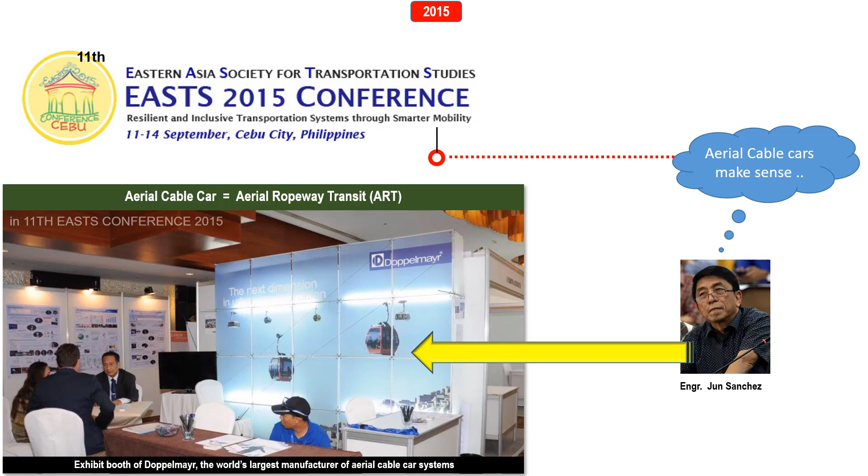Jun Sanchez is the chairman of the Metro Cebu Development and Coordinating Board Subcommittee on Infrastructure and Utilities. MCDCB is a body mandated to formulate development plans for the Metro Cebu area and coordinate their implementation. Its board is composed of the governor, the mayors of 13 cities and municipalities, regional heads of national government agencies, and private sector representatives.

In 2017, Jun and Kim Sanchez visited the ART in La Paz, Bolivia. As of this video in 2023, the La Paz ART is still the largest network of ARTs in the world, composed of 10 lines at 31 kilometers.

In 2018, engineers Jun and Kim Sanchez and transportation engineering expert Lynn Madrona made a learning visit at the Doppelmayr headquarters in Wolfurt, Austria. Since 2018, a team of engineers from Cebu and Manila have been in contact with Doppelmayr, Austria, learning more about ART and conducting ART studies.

JICA-funded Cebu Transportation Master Plan. JICA, or the Japan International Cooperation Agency, is a funding agency of the government of Japan. It provides financial and technical assistance to mostly developing countries through grants and loans.

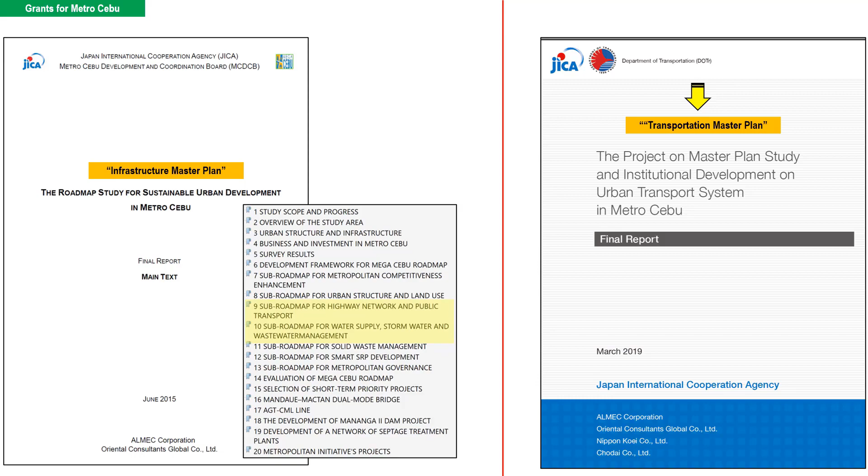JICA provided grants at no expense to the government for two very important infrastructure studies for Metro Cebu. The first was an infrastructure master plan that includes major roads, transportation, drainage, sewerage, and water supply. The second was a more detailed Transportation Master Plan. Recent examples of projects funded by JICA include the Fernan Bridge and the SRP Reclamation and Viaduct.

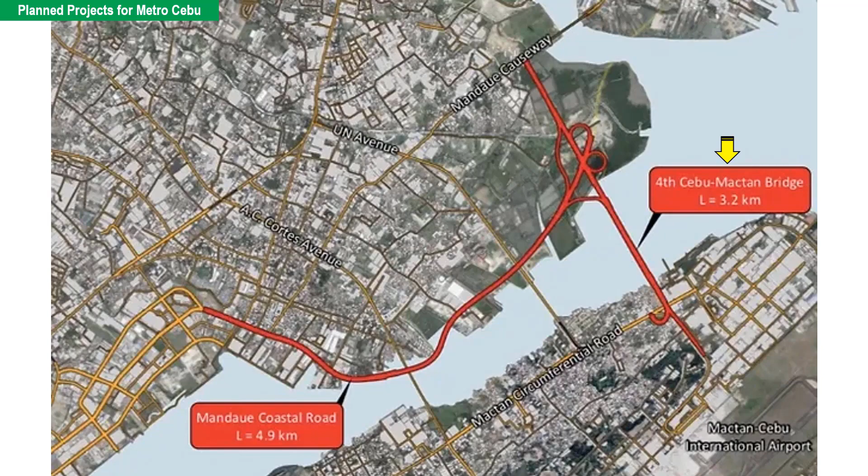Based on the two recent JICA studies, there are three major transportation projects that may be implemented soon. They are currently undergoing more detailed studies. The first two projects are the Mandaue Coastal Road and the Cebu-Mactan 4th Bridge. The third project is the implementation of LRT projects in Metro Cebu. The implementation of these two LRT projects is scheduled to start between 2025 to 2030.

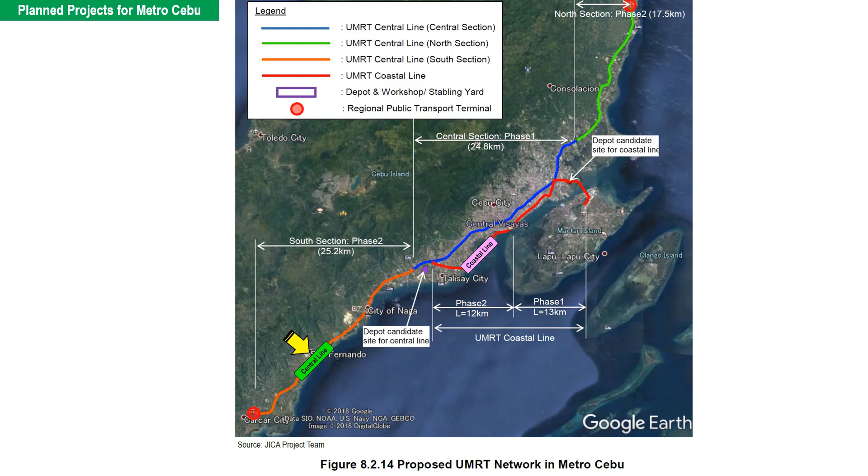The first is the Central Line. The second is the Coastal Line.

The two JICA studies proposed three types of potential mass transportation projects. First is the BRT. The JICA study did not elaborate on the BRT. There are already detailed studies on the Cebu BRT funded by the World Bank from 2011 to 2022. Its construction started in 2023.

Second is the ART. As with BRT, JICA did not elaborate on the ART. It cites its successful implementation in La Paz, Bolivia as a mode of transport. It recommends a feasibility study on potential routes. Japanese companies do not make urban ARTs, thus it is unlikely that an ART project will be funded through JICA.

The first urban ART in Yokohama, Japan was installed in 2021 by Doppelmayr, an Austrian company. Almost all urban ARTs in the world are built by European companies. Details on funding options for an ART will be elaborated in other chapters.

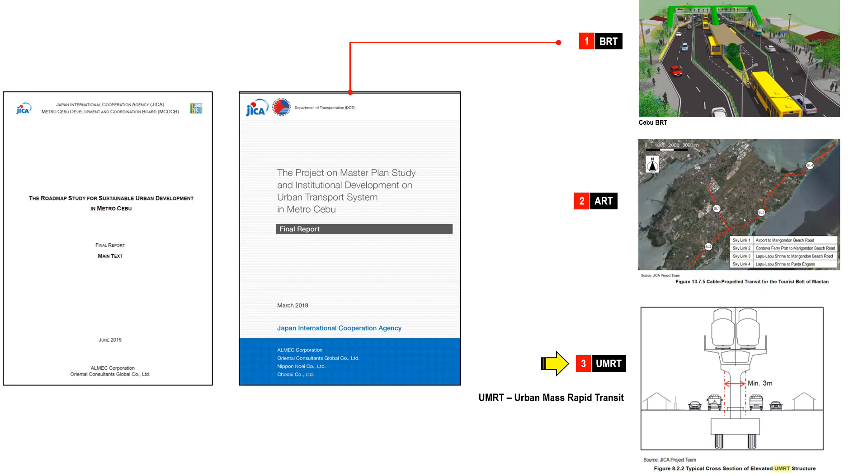Third is UMRT, or Urban Mass Rapid Transit. JICA has proposed two types of UMRT. First is LRT, or light rail transit. Second is AGT, or automated guideway transit. The main difference between the two is the LRT is propelled through steel tires, while the AGT is propelled through rubber tires. JICA has not yet decided which one to use. For this video series, we will assume it will be an LRT.

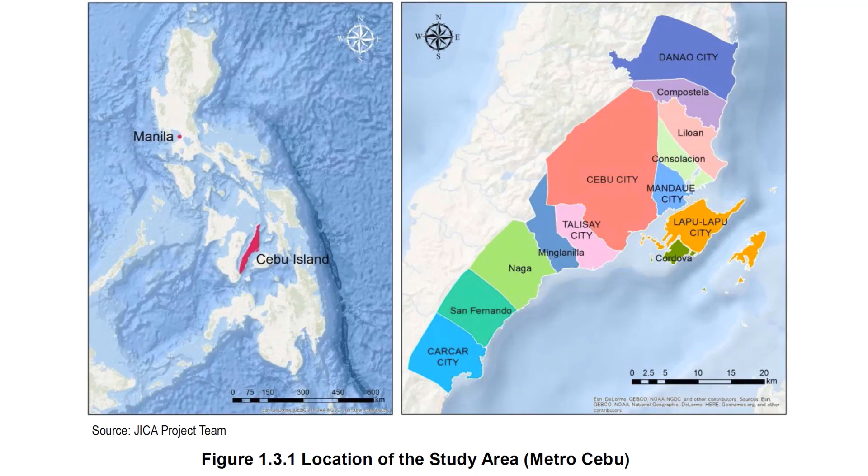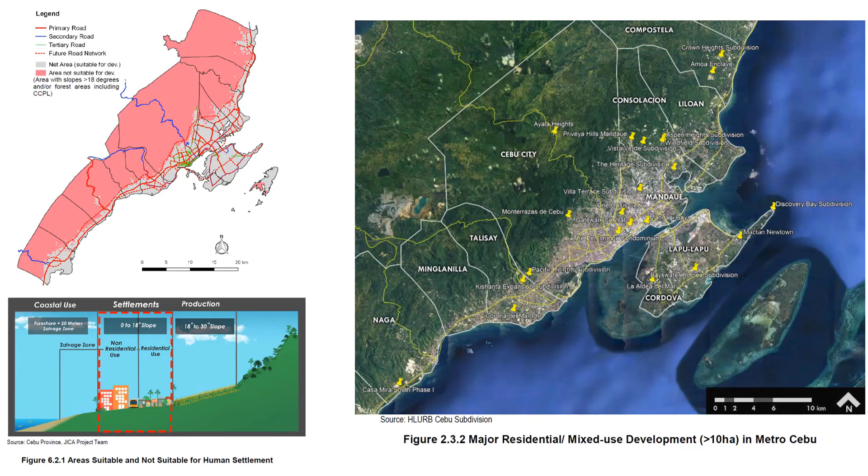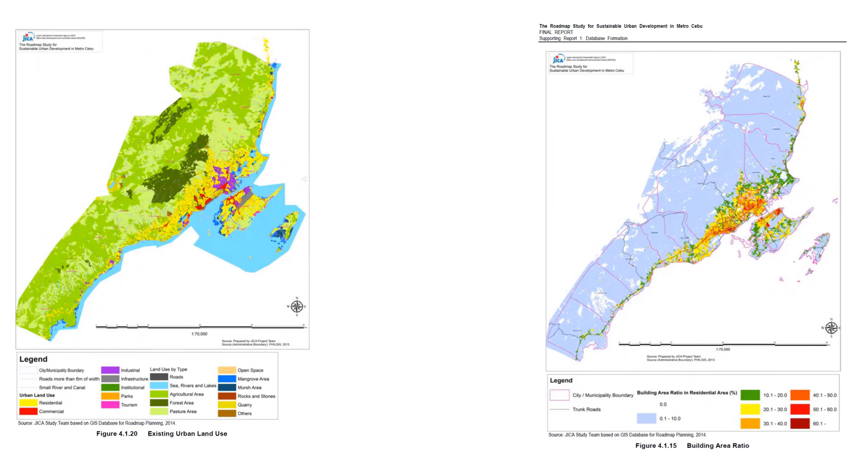JICA passenger traffic data collection and analysis. The JICA study covers the 13 component cities and municipalities composing the expanded Metro Cebu. The following parts of this video will show some of the passenger traffic data that were collected by JICA to determine the passenger demand in different parts of Metro Cebu. This data will then be used to determine a suitable mode of transport for a particular area in Metro Cebu. These are some of the data collected by JICA in determining passenger demand.

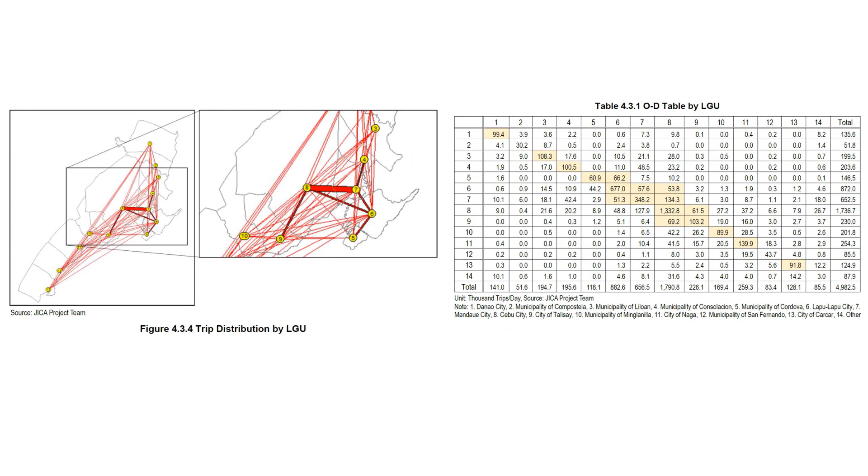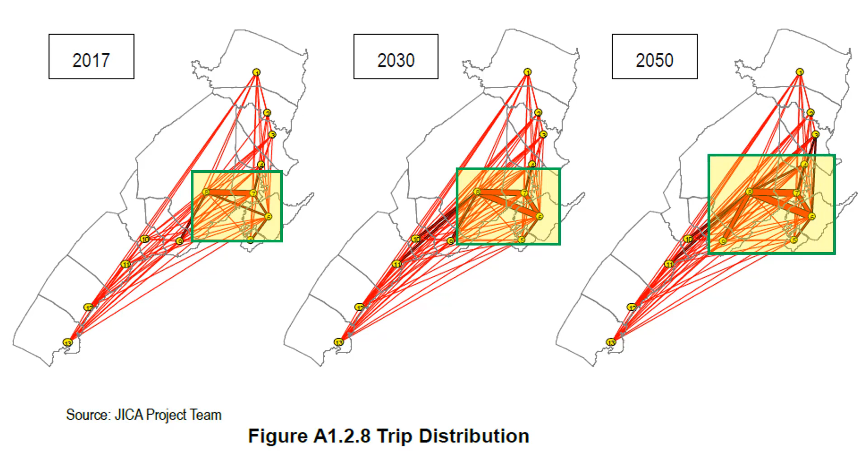Origin-destination surveys were conducted in Metro Cebu by LGU. The highest passenger traffic measured in 2017 was among passengers traveling in the tri-cities of Cebu, Mandaue, and Lapu-Lapu. There will be a massive increase by 2030 and 2050. The highest number of cars, motorcycles, and demand for public transport is in Cebu City, Mandaue, and Lapu-Lapu.

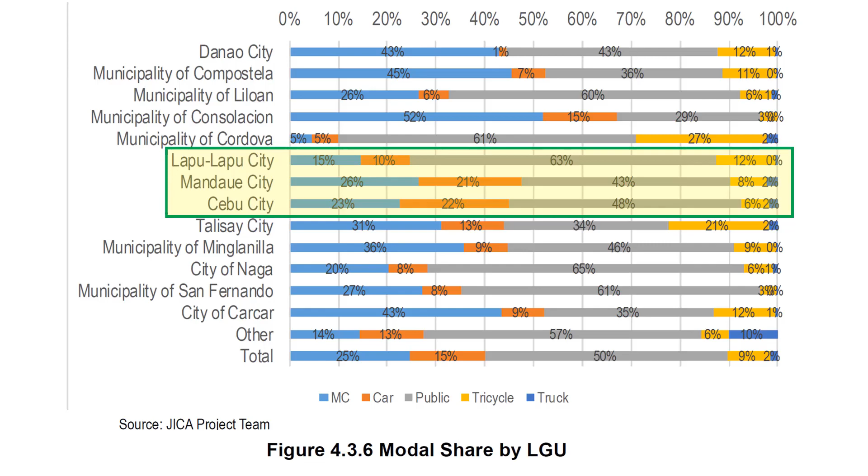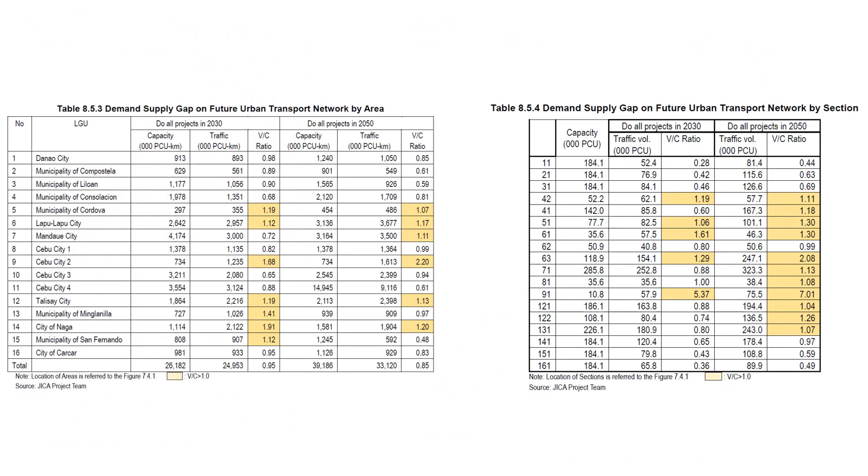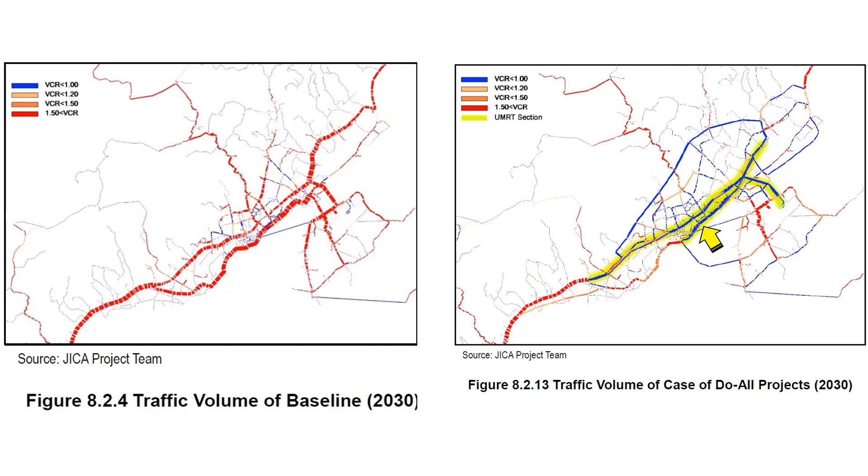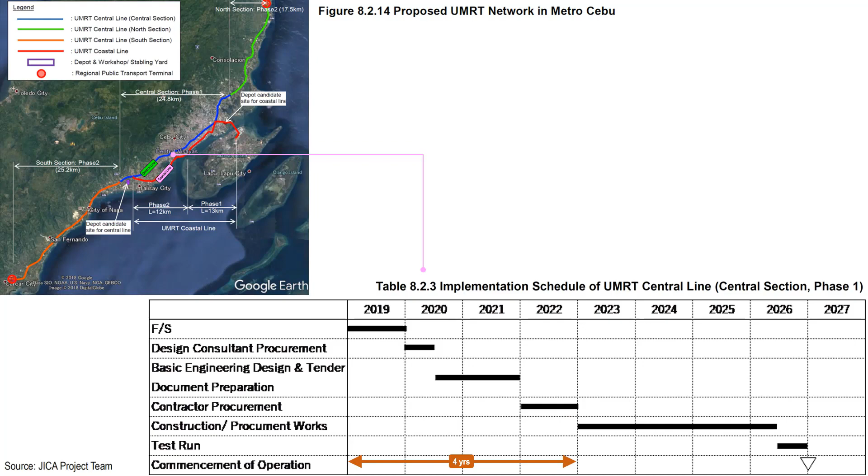The limit of this blue line is the location of the first phase of the Cebu LRT. This shows its implementation schedule. The feasibility study was supposed to have started in 2019, and construction was supposed to have started in January 2023. This 4-year period could simultaneously have been used to acquire additional right-of-way.

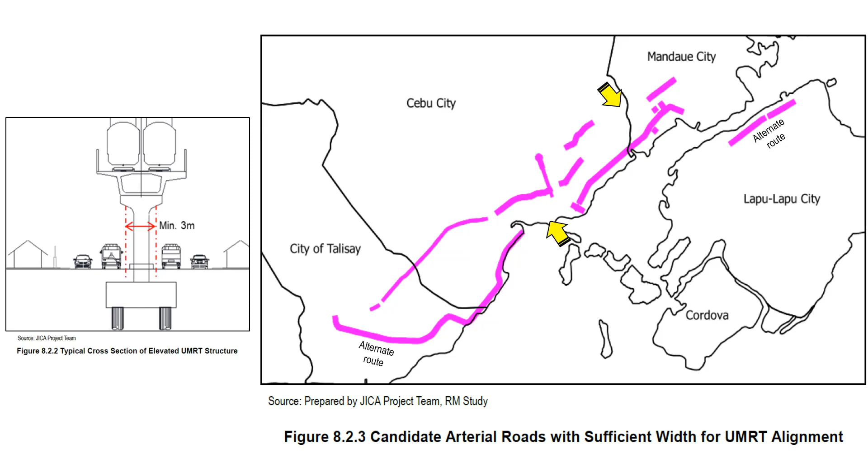This is a typical section of a 4-lane road in Cebu. To accommodate an LRT, the right-of-way needs to be increased by 3 meters, or the width of 1 road lane. In contrast, a BRT needs 2 road lanes. If bike lanes will be installed, an additional width of 2 meters is required.

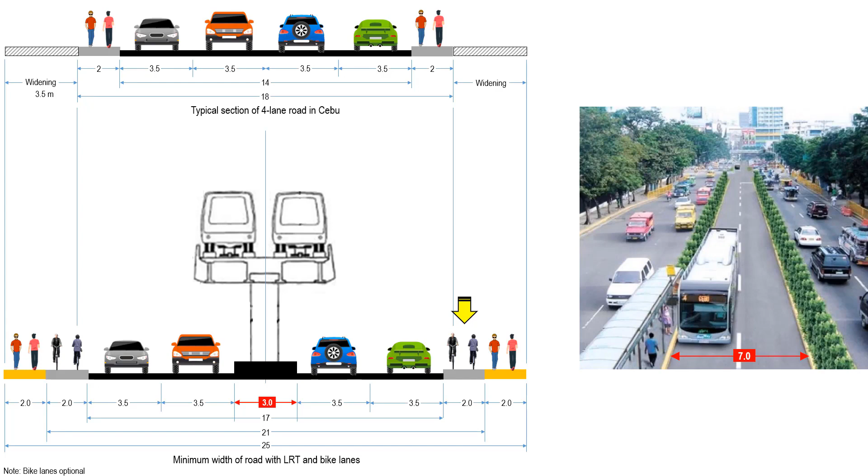Superimposing the central line and coastal line, it can be seen that extensive widening is required. These 2 most viable routes in Metro Cebu are about 25 kilometers each. It will take 5 to 10 years to acquire the widening along these 2 lines since they are already populated by numerous buildings on both sides.

The potential of Metro Cebu to have an LRT as early as possible greatly depends on the progress of acquiring the needed right-of-way. These 2 LRT lines can be implemented, and JICA has a very good record of implementing its proposed projects. LRTs appear to be the only viable mode of mass transport for the high passenger demand corridors in Cebu.

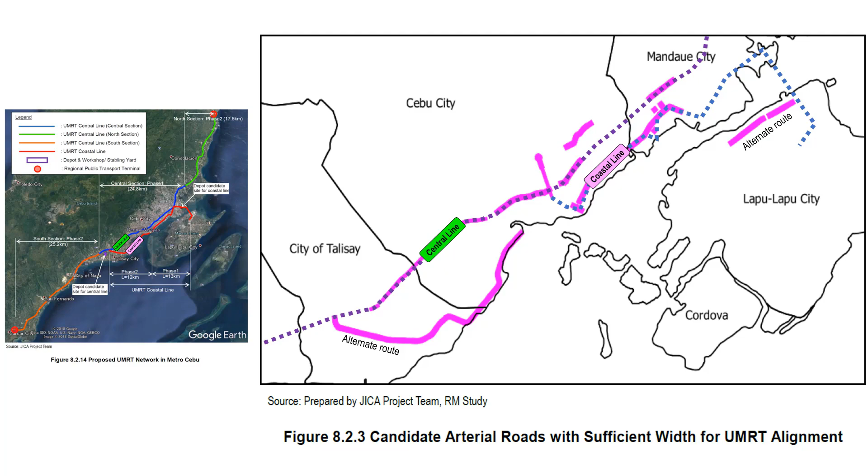BRT cannot serve high-capacity corridors, particularly in Cebu where roads are narrow. Again, the feasibility study of LRT Phase 1 was supposed to have started in 2019, but as of the posting of this video in 2023, the feasibility study has not yet started. Hopefully, this LRT project will start soon with the help of JICA.

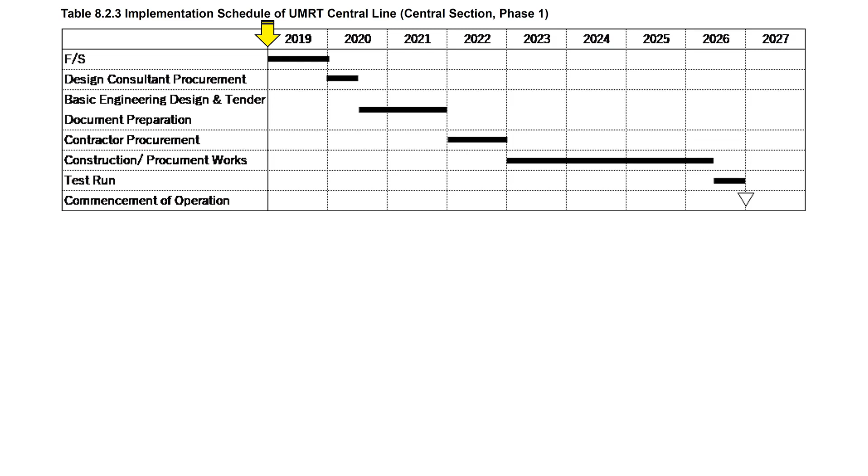There is no other solution to solve the vehicle traffic along the high passenger demand corridors in Metro Cebu. For purposes of planning or projection, we will assume that JICA might be able to start the feasibility study in January 2024. The completion of LRT Phase 1 will now be completed in 2032 instead of 2027.

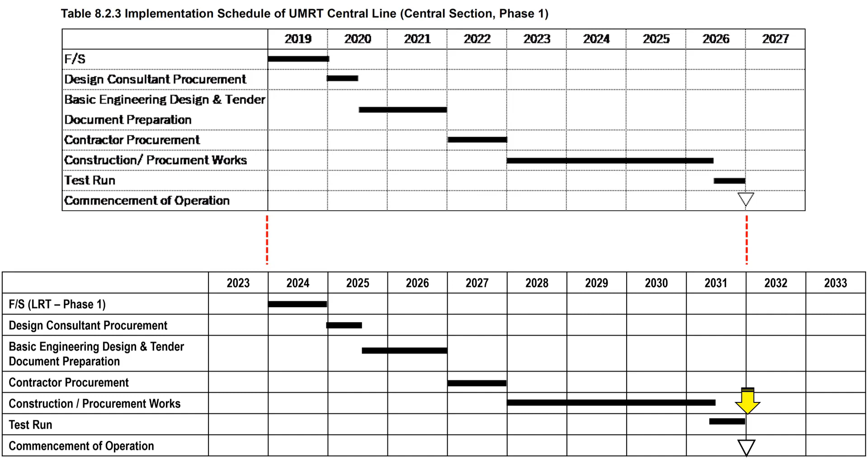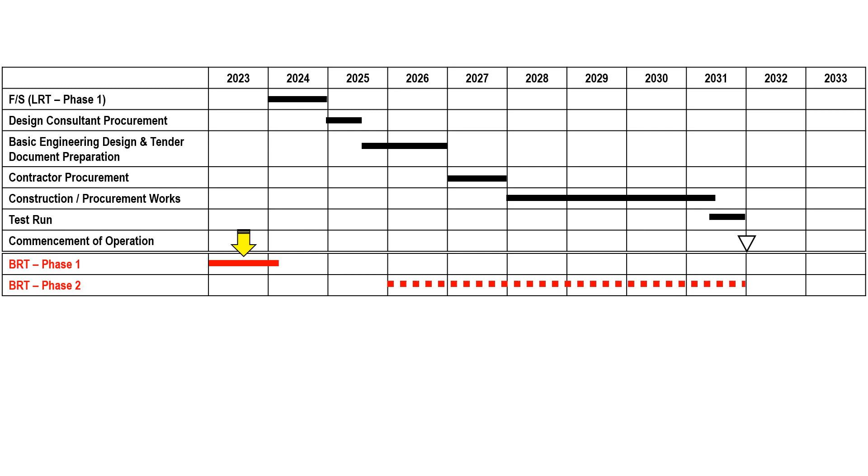Again, this is the new schedule of the feasibility study for LRT Phase 1. The BRT Phase 1 started in January 2023 and will be completed in early 2024. It is so short at 3 kilometers and only located on one road at Osmeña Boulevard. It is expected to improve traffic at this road but not in the rest of Metro Cebu.

In the meantime, over the next 10 years, there will likely be increasingly worsening traffic conditions in Metro Cebu. During these 10 agonizing years of waiting, ART might be able to contribute to reducing traffic congestion. There are a total of 7 ART lines that can potentially be installed in Metro Cebu to serve medium-capacity corridors.

One ART line can be designed, financed, and installed within 3 years, as was done in La Paz, Bolivia. This will be elaborated in the next chapter and in other chapter videos.